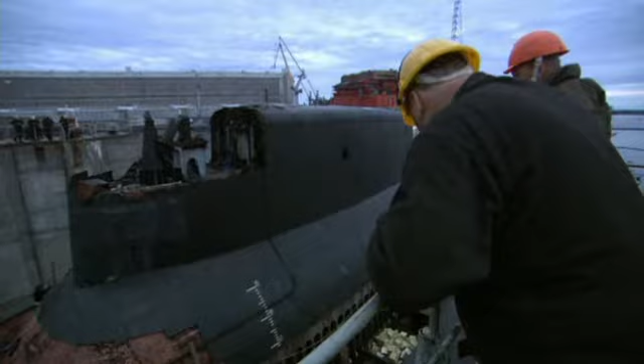It's a risky mission. They must dismantle, decontaminate, and dispose of 2 nuclear reactors filled with radioactive waste. A minor accident could be a radioactive disaster. It's the ultimate challenge, breaking down the Typhoon.

Severodvinsk, Russia, a small industrial city on the shores of the White Sea. The winter temperatures are brutal and the daylight hours are short. In this frozen no man's land sits one of the largest Cold War relics in the world, a Typhoon-class Soviet nuclear submarine. The Soviets called it Akula, the shark, and like its namesake, it's a deadly predator.

The massive sub stretches 170 meters long, stands over 4 stories tall, and weighs over 23,500 tons. It's almost as large as a cruise liner. In its prime, this first strike war machine carried 20 nuclear missiles and housed 150 elite Soviet submariners.

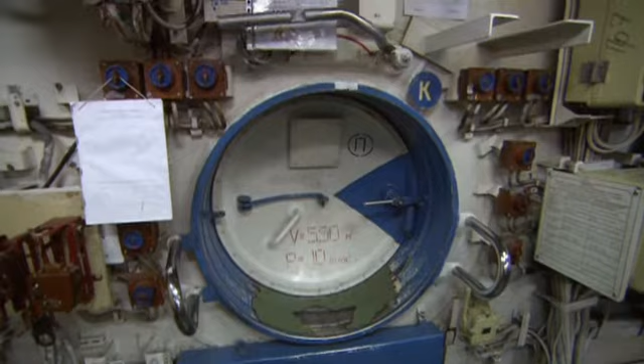The Typhoon was constructed to withstand a nuclear strike. Deliberately deconstructing it was never considered by its Soviet designers. It will be an epic challenge for Captain Piroshkov and his crew, most of them also retired Navy officers.

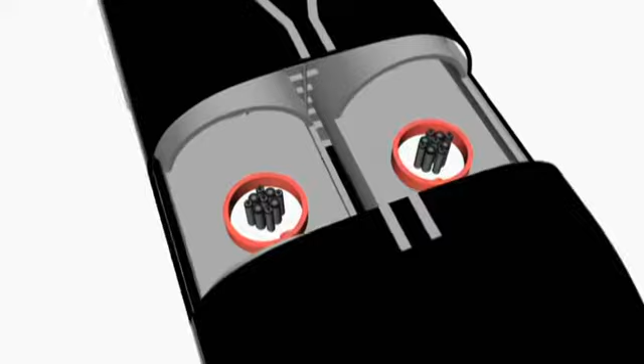They've already stripped the Typhoon of its top-secret technology and its 20 nuclear missiles. But Captain Piroshkov knows how dangerous this sub still is. It's powered by not 1, but 2 nuclear reactors. Inside those reactors sit radioactive fuel rods and liquid nuclear waste.

If that radiation escapes, this Typhoon could be a mini Chernobyl, potentially killing shipyard workers and poisoning the local residents. The entire town of Severodvinsk could be contaminated for years.

Captain Piroshkov's team of specially trained salvage experts will take the Typhoon apart in 4 carefully controlled stages. Stage 1: remove the highly radioactive uranium rods from the submarine's reactors. Stage 2: remove the reactor's liquid coolant, also dangerously radioactive. Stage 3: bring the sub into dry dock and cut its hull away, leaving only its radioactive reactor compartments. And finally, Stage 4: float the radioactive compartments to a nuclear waste dump on a remote island 800 kilometers away.

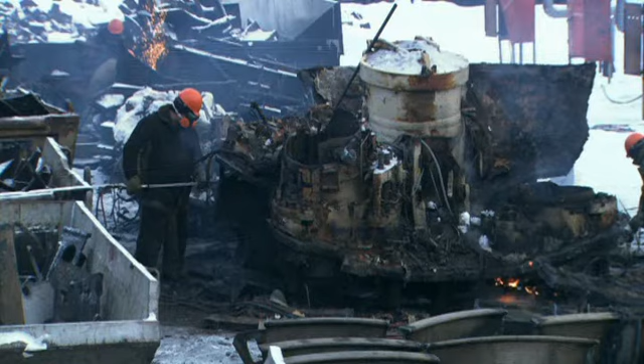The breakdown will take place in the once super-secret Zvyozdochka shipyard. This is where the Soviet Union maintained the ships and subs of its Cold War fleet. It looks like an oversized junkyard, but it's one of only 3 facilities in Russia that can safely break down a nuclear submarine.

Captain Piroshkov's mission begins on a bitter cold February morning, 24 hours before stage 1 of the breakdown begins. The temperature outside is minus 15 degrees Celsius. The Typhoon is icebound. But soon it will begin its final journey.

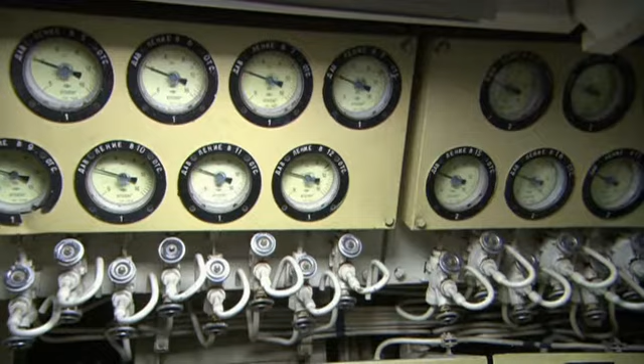Captain Piroshkov has kept the Typhoon powered down for the last several months, enough time for its nuclear fuel to cool down to a safer radiation level. Deep in the reactor core, the fuel rods are still radioactive, but not hot enough to risk a nuclear chain reaction when they are removed. Powered down, most of the sub is dark, like a ghost ship haunted by the loss of a bygone era.

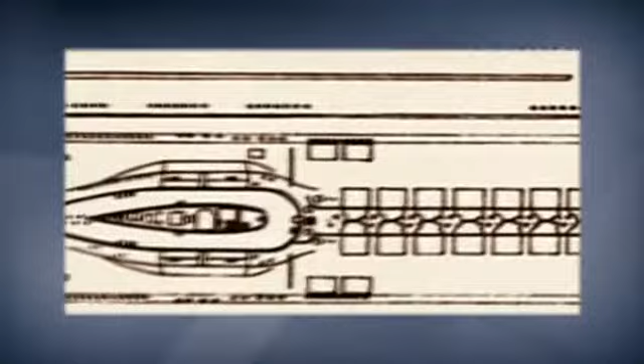The Soviet Navy first deployed the Typhoon-class submarine during the Cold War in the 1980s. It was the largest submarine ever built. Only 6 of its kind were ever constructed. It was designed with World War III in mind, a mobile attack weapon armed with 20 intercontinental ballistic missiles, each carrying multiple nuclear warheads. From deep beneath the sea, the Typhoon could hit targets over 10,000 kilometers away. A single one of these 83-ton nuclear missiles could destroy a city the size of New York.

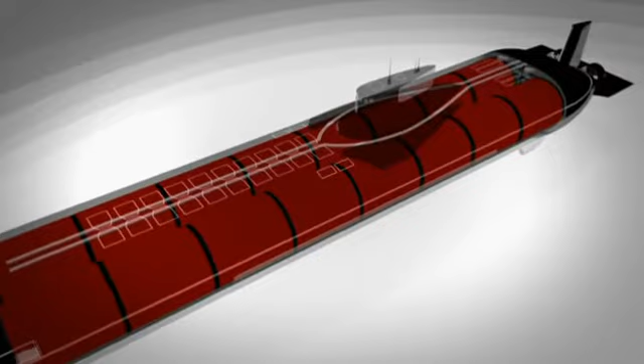Creating a submarine to accommodate these missiles and a crew of 150 meant designing a revolutionary hull structure. The Typhoon is the only submarine ever built with not one, but 2 inner hulls. They run side by side within the 170-meter external hull, improving the Typhoon's survivability. Even if one hull is breached, the crew could evacuate to the other hull for safety.

The Typhoon is essentially a floating nuclear power station, generating enough energy to power a small city. Its giant propellers are driven by some of the biggest nuclear reactors ever put on a submarine.

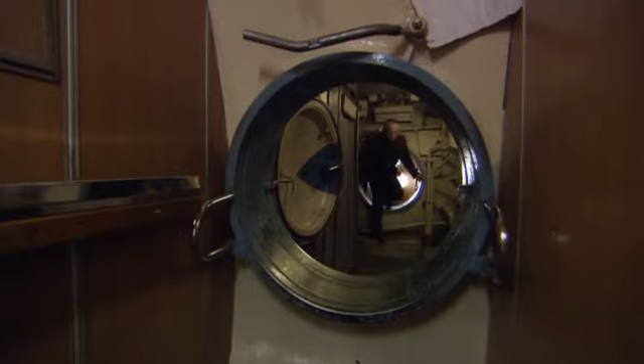Captain Piroshkov's heading for those reactor chambers. He must inspect them one last time before dismantling begins. His path takes him by the sub's various amenities, including the gym. A sailor on a submarine doesn't have very many opportunities to move around, so on a Typhoon, they had a gym.

Here, there's a punching bag. If you want to work on your cardio, here you have a basic treadmill.

Sub-commanders and their crews lived underwater for up to 4 months. It was a town beneath the sea. And the Typhoon had one luxury not found on any other sub. Because of its unique size, this particular submarine allowed for a swimming pool where the sailors could go for a swim.

Captain Piroshkov's destination is Compartment 19, the site of Typhoon's nuclear reactors. To most of the Typhoon's crew, Compartment 19 was and is off limits.

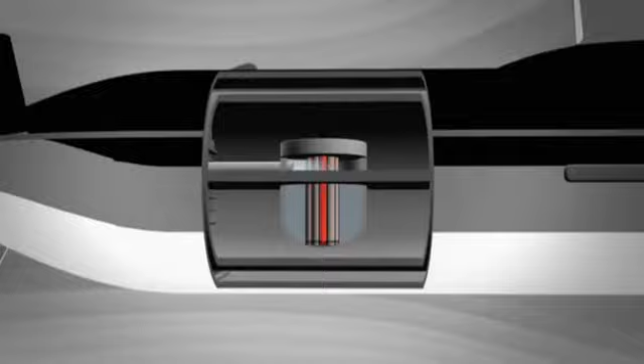Most nuclear-powered subs have 1 reactor. The Typhoon has 2. A submarine's reactor is essentially a highly radioactive tea kettle. Metal tubes filled with uranium fuel tablets serve as heating elements. Water circulates around these radioactive fuel rods, cooling them and producing steam. The steam then powers the submarine's propulsion systems. The reactor is sealed to prevent any radiation from leaking out.

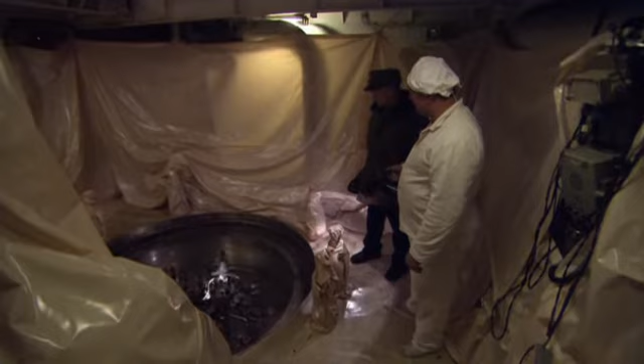At dawn, Captain Piroshkov's team of engineers will begin the dangerous task of removing the nuclear material from the twin reactors. They have wrapped the entire area in plastic. It looks flimsy, but in the worst-case scenario of a radiation leak, it will contain the radioactive particles and protect the crew. This area will be totally off-limits once they breach the reactor's lid and expose the fuel rods.

With just hours to go, everyone is on high alert. Captain Poroshkov gives the order to breach the Typhoon's reactors. The sub's nuclear fuel rods must be removed from its reactor cores. They'll be encased in radiation-proof containers and lifted out by this giant 72-ton crane.

But the weather may be the wild card in Captain Poroshkov's plans. The shipyard sits 2,800 kilometers from the North Pole. Fierce winter storms with strong winds can strike without warning. A rogue gust of wind hitting the crane while it's unloading could cause a deadly radiation leak. So the crane has an automatic shutoff sensor. If the wind is too strong, the 72-ton machine will instantly shut down.

A heavy winter storm threatens the city. But Captain Poroshkov decides to go ahead despite the weather. He gives the order to begin the destruction of the largest submarine ever built.

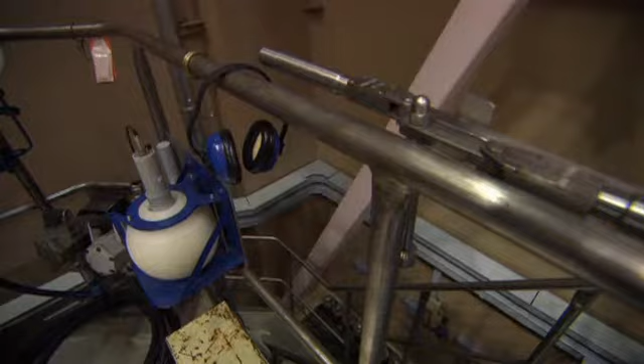Stage 1 of the Typhoon submarine dismantling. The team begins the removal of fuel from the sub's 2 reactors. Now, Viktor Yarmoshenko takes over. He's the engineer in charge of the reactor defueling operation.

We do this to protect the environment. We wouldn't want radioactive waste collecting on the sea bottom. Also, we're aware that spent nuclear fuel can be used in nuclear terrorism to make a dirty bomb, so we have to carefully remove it.

Viktor's challenge is something the Typhoon's designers never envisioned. He must break into its reactors and remove the radioactive uranium fuel rods without exposing his team or the environment to the deadly radiation.

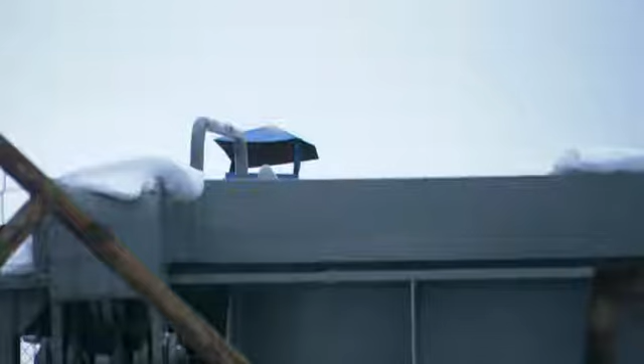The defueling process is potentially very dangerous, so we have to maintain very strict rules of radiation safety here and constantly monitor the reactor. He clears the submarine of all personnel. No one is allowed inside the reactor compartment once the defueling begins. It is simply too dangerous.

They load the first uranium rod into a special transport container made of radiation-proof lead. A crane then lifts this lead bottle off the sub and swings each rod into the storage hangar. Everyone is on edge.

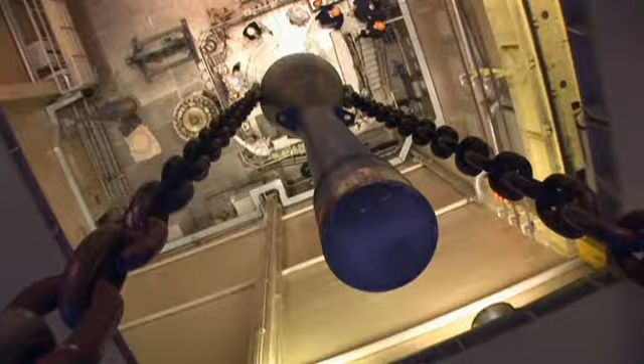There's enough uranium in this bottle to kill everyone in the room and contaminate the entire city.

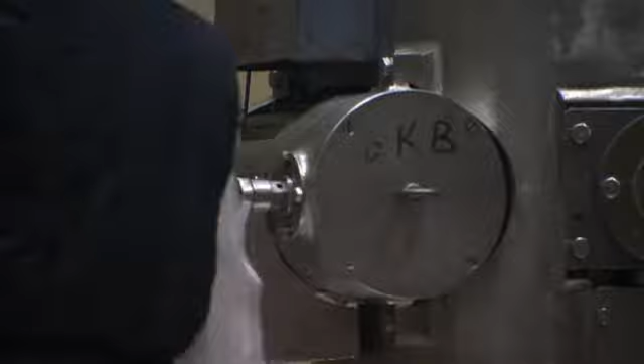The workers guide the fuel rod with extreme care into another radiation-proof drum. Once the rod is safely in, it's sealed. The crane performs this delicate and dangerous operation multiple times in the next several days. There can't be a moment's lapse in attention, no matter the freezing cold or fraying nerves. The smallest mistake could cause a fatal accident.

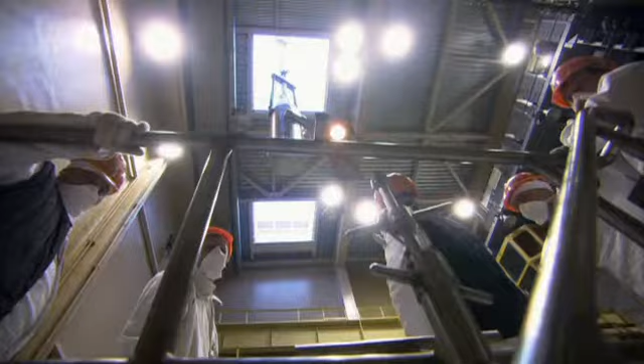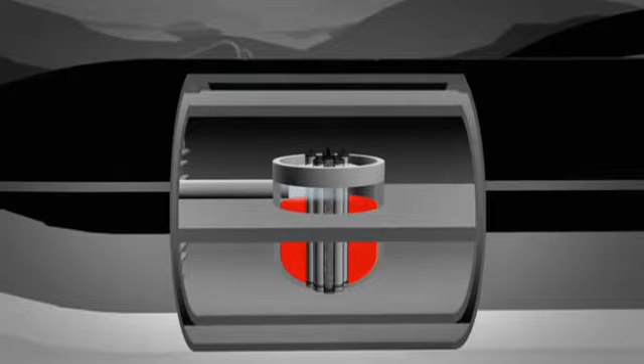When the last uranium rod lands in the storage container, Stage 2 begins, removing the radioactive liquid coolant from the dead reactors. When the sub was on active duty, the coolant flowed around the hot nuclear fuel rods inside the reactor to cool them and produce steam for the propellers. It's highly radioactive and deadly. The coolant is pumped from the Typhoon's reactor to this storage facility on the docks.

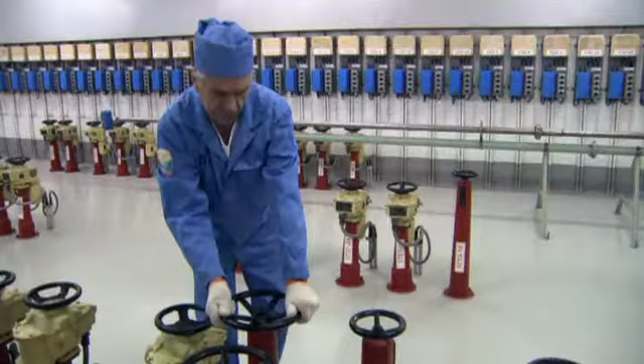Here, the irradiated nuclear coolant is stored in steel containers encased in thick layers of concrete. Workers constantly monitor the radiation levels. Any increase, and this entire facility will be evacuated and sealed. But this nuclear waste isn't just going to sit here. With a turn of a valve, it begins flowing through underground pipes to the processing lab where the radioactive solids are filtered out.

Engineer Anton Chinakhov is in charge. Anton and his entire team must wear protective clothing. The uniform is necessary to protect our bodies from radioactive contamination and also to prevent the radioactive particles from being carried outside the worksite. So that's why we put on the robe, the hat, and the booties.

This is the heart of Stage 2 of the Typhoon's dismantling and Anton's mission control. These pipes are pumping nuclear coolant. None of Anton's team will ever see this highly radioactive liquid. If they do see it, it'll mean something's gone very wrong.

Liquid nuclear waste contains radioactive isotopes. They emit radioactive rays dangerous for the human body. Besides that, this waste contains a variety of toxic additives. So to protect the people who live around here and to protect the environment, there's a certain special way of handling this type of waste.

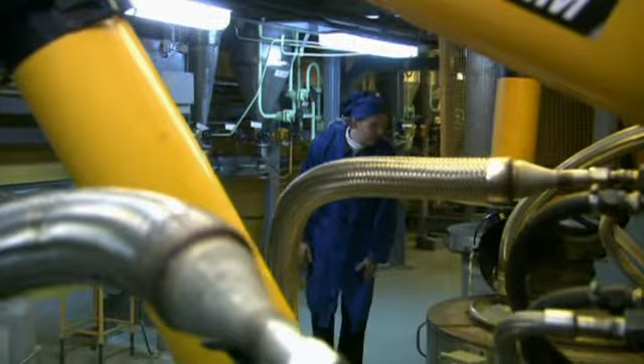The radioactive waste passes through a special chamber to trap its deadliest isotope, cesium. A speck of cesium the size of a pinhead can kill a human within minutes. So they'll dispose of it separately.

The way this works is, the liquid nuclear waste goes through a layer of a special absorbent, which isolates the cesium isotope. The absorbent is held in a special filter, which is here inside a protective container made of thick steel.

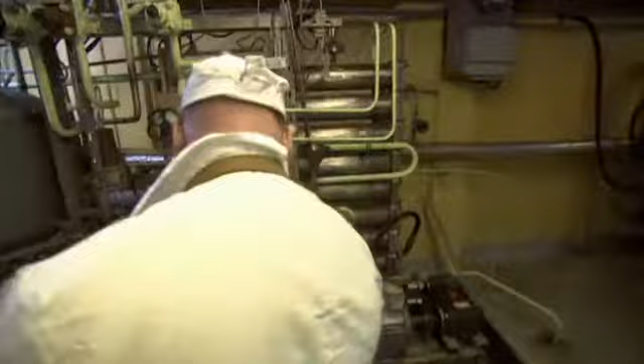The cesium's caught, but the liquid coolant is still far from clean. A second set of filters catch the remaining heavy radioactive particles. It all happens inside these thick steel containers to protect Anton's team.

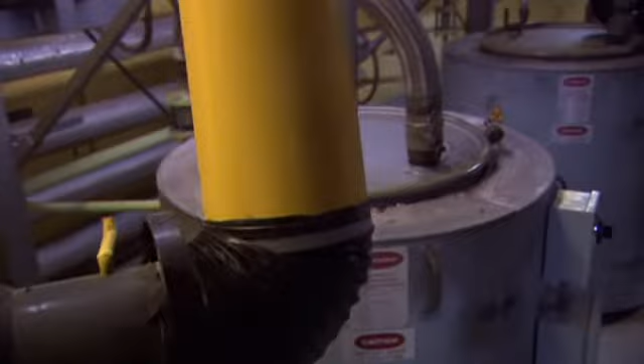A powerful dryer then turns the solids separated from the liquid coolant into a highly radioactive concentrate, the consistency of salt. So it means as a result of the processing, the volume of nuclear waste is reduced by 100 to 1,000 times.

Anton takes samples of the water separated from the radioactive concentrate and sends them to an off-site lab for purity testing. When he receives final confirmation the water is completely free of radiation and toxins, Anton will order it flushed into the sea.

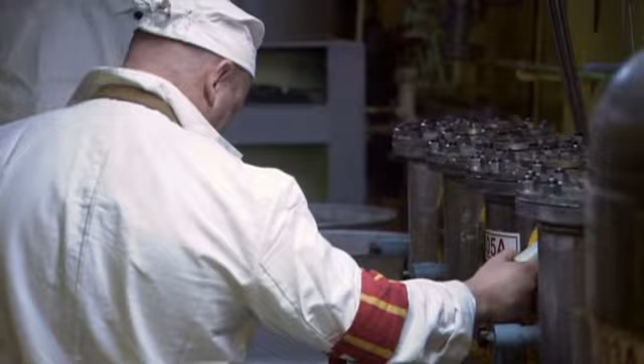Stage 1 of the Typhoon's dismantling took days. Stage 2, processing liters of nuclear coolant, takes several months. And just like the earlier removal of the fuel rods, constant attention can be the difference between life and death for Anton's crew.

Workers constantly monitor radiation levels with Geiger counters. We have documents that set a norm for radiation levels for personnel which can't be exceeded. If the radiation levels go above the norm, it will trigger an alarm and we will take measures to lower the radiation levels.

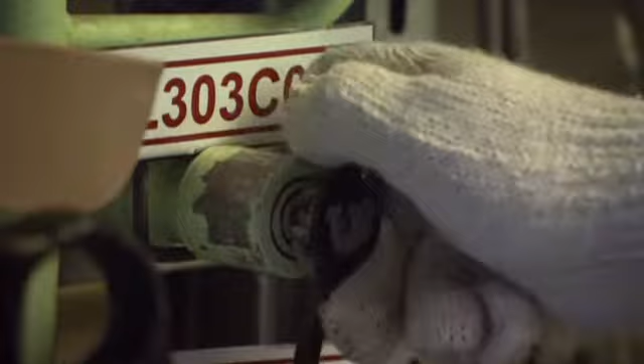A spill of the liquid nuclear waste would quickly spread radiation beyond this lab, potentially into the soil. It would be nearly impossible to clean up and could contaminate the local area for generations. In addition to the specially trained personnel, an automated system monitors the radiation levels.

Stage 2 proceeds. Anton's satisfied. The radiation levels are safe and steady, but that could change in seconds. If the radiation levels are elevated, the sensors go off and the alarms are triggered, and all personnel are notified.

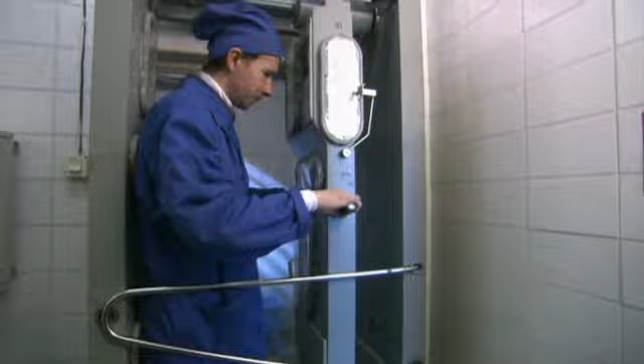At the end of every day, each member of Anton's team undergoes a full body scan for radioactive particles. Anton gets the white light. He's in the clear.

Several months later, winter turns to spring. The crew has safely removed all the radioactive coolant from the sub's reactors and stored its uranium fuel rods. Now, stage 3 can begin.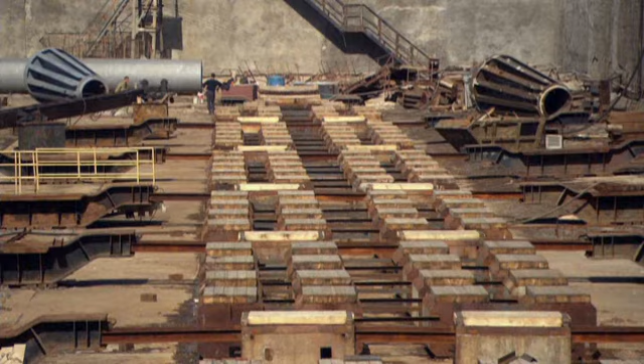It may be the toughest challenge of them all. They must maneuver the immense sub into a dry dock barely big enough to hold it, cut it apart, and recycle it.

And the man in charge of this entire dismantling operation, Captain Vladimir Poroshkov, isn't even sure if this Typhoon will float. The sub's position in the water has changed. We must make sure it doesn't tip forward or sideways.

The May sun has melted the ice around the Russian nuclear submarine. The crew readies the sub for the last journey it will ever make. It's heading 8 kilometers across the channel to the shipyard's massive dry dock,

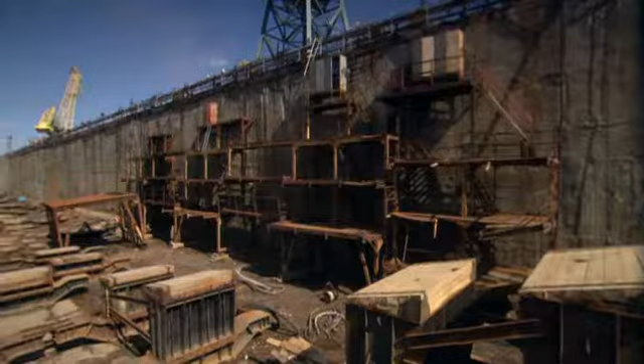where it'll be cut into scrap metal and recycled. But it's a difficult task to move a 23,500-ton ship that no longer has an engine. Akula, the Russian shark, is now a beached whale.

But first, the crew must lighten the huge sub, or the tugboats won't be able to maneuver it into the dry dock. And even if the tugs could maneuver it, right now the immense sub is too heavy for the dry dock floor.

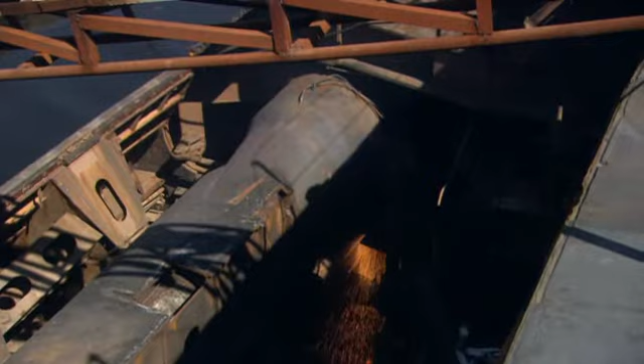Captain Poroshkov tours the ship constantly as his crew cut away its missile silos and stabilizing ballast. This ship is really big and heavy, so we're doing this to lighten the amount of pressure on a dockside platform.

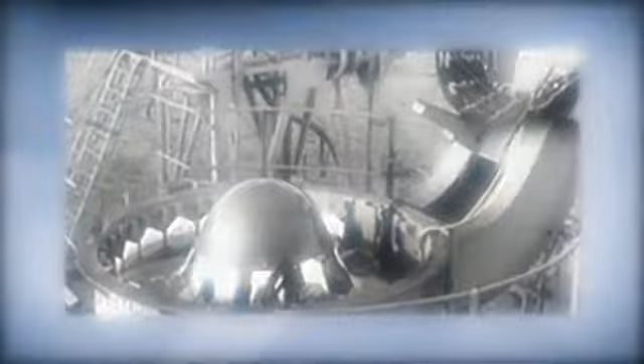Piece by massive piece, a giant crane drags off what were once integral parts of a deadly war machine, including these missile tubes, the launch site for a nuclear weapon that could destroy a distant city.

Now it's just scrap metal, destined for recycling. It takes the crew 3 weeks to strip away the heaviest sections of the Typhoon.

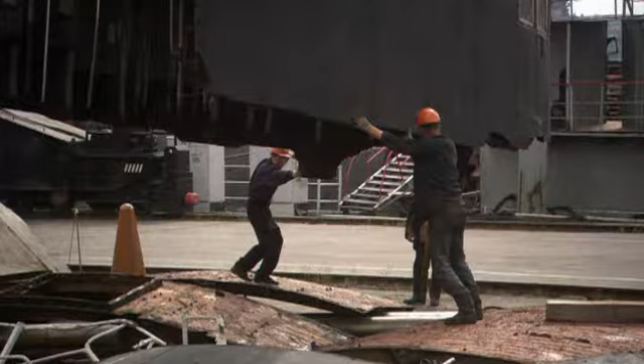The captain's bridge, huge chunks of the outer hull, and parts of the sub's steering and stabilization systems. The vertical steering fin has been removed. It is really not necessary for maneuvering the sub into the dock, so we cut it off.

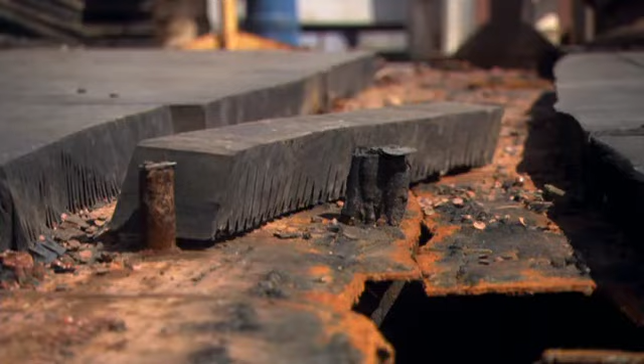They must also remove the sub's unique protective layer. This is hydroacoustic coating. It covers the submarine hull in its entirety. The rubber absorbed acoustic signals from the inside of the sub, making it virtually undetectable to the enemy. Silence was the Typhoon's primary defense against surveillance and attack subs.

In order to dismantle the outer hull, we need to take all this rubber coating off, and the metal is then recycled. The rubber is also recycled. It can be melted down and used to add in asphalt or car tires.

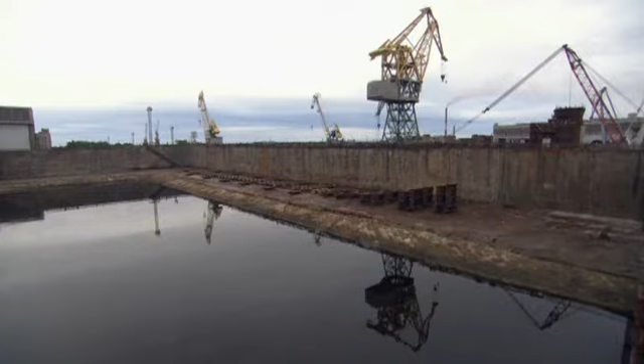The captain must make sure the Typhoon is ready to be brought into the dry dock. Inside, they will beach her on a flat platform. Anything on the outside of the hull that might cause it to topple over must be cut away while the sub is still afloat.

Captain Poroshkov sends a team of divers to examine the submarine's bottom. The diver disappears into the murky water and reports in as he moves along the giant hull.

How much distance between the body and the seabed? Good. Keep moving, keep moving. Do you see anything?

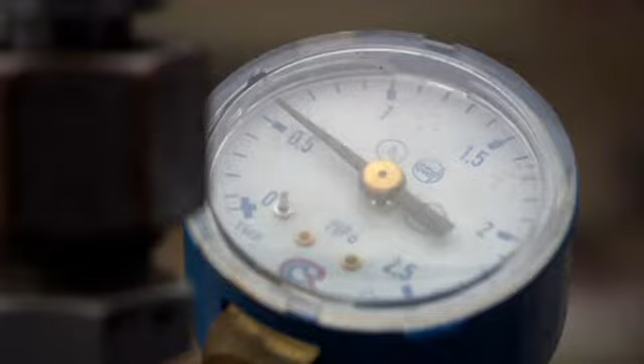The diver stays under for almost an hour. I want to make sure nothing is sticking out over there. Finally, he emerges. It's all clear. All I saw was fish, clams, and seals.

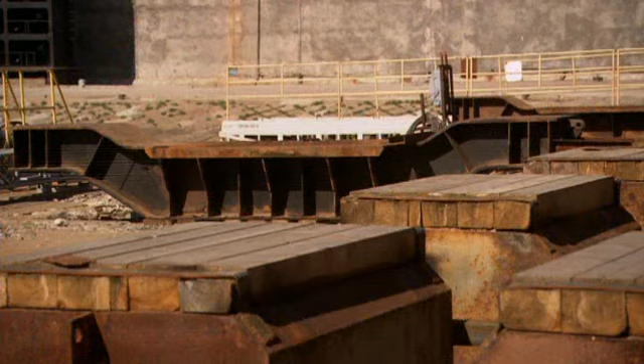The Typhoon is ready to move. Meanwhile, on the other side of the harbor, the dry dock is ready for the sub's arrival. Engineers and construction workers have built a giant framework of steel and concrete to hold and support the Typhoon. These supports will take the entire weight of the massive submarine when the water's drained from the dry dock.

But the sub must be parked exactly above these supports. If she's not, she could topple over when the water drains and crash to the bottom of the concrete pool. Dockmaster Yuri Kavardin must line up the 170-meter vessel with incredible accuracy.

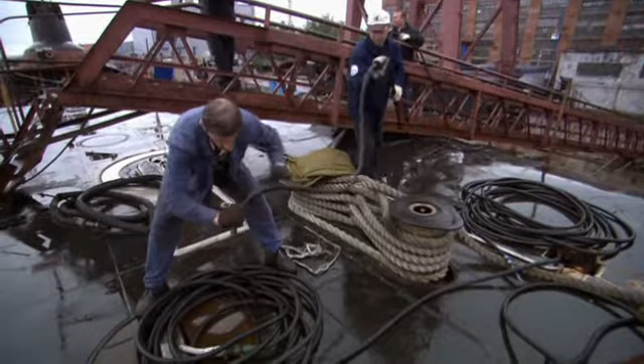Captain Parashkov's crew aboard the Typhoon reel in its anchoring cables. It's about to begin its final journey. It's a task of remarkable precision.

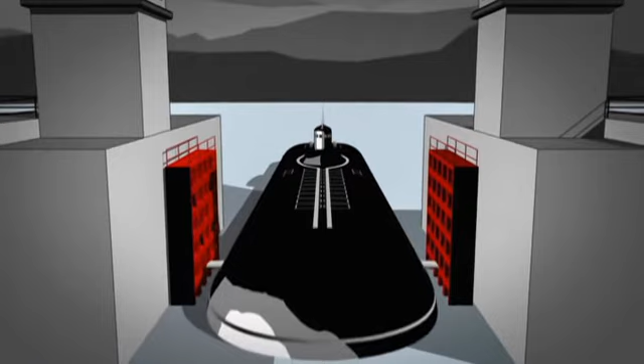The dry dock was never designed with a Typhoon-class submarine in mind. Its gate is 25 meters wide. The sub's hull measures over 24 meters across, affording it less than 1.5 meters clearance on either side. That's a tight fit. And although the Typhoon's nuclear fuel and coolant have been removed, its reactor chambers are still highly radioactive. Worst case scenario, a collision with the dry dock gate could cause a radioactive leak.

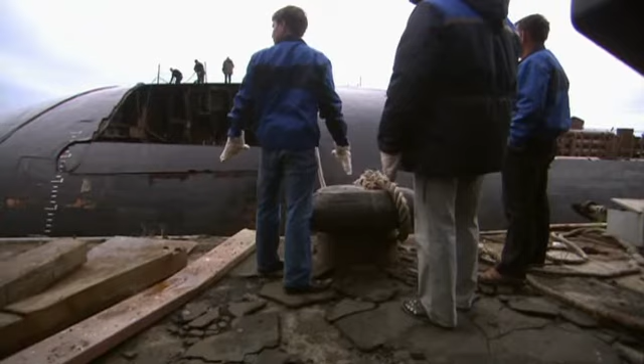That's if it gets to the dry dock gate at all. The team has lightened the sub so that tugboats can tow it. But stripping it down has made it unseaworthy. There is no manual for dismantling a Typhoon.

As the sub is lightened, it raises in the water. The sub's position in the water has changed. Our goal now, to keep it afloat without any leaning forward or sideways. If the hull leans to one side, it will make the sub impossible to maneuver.

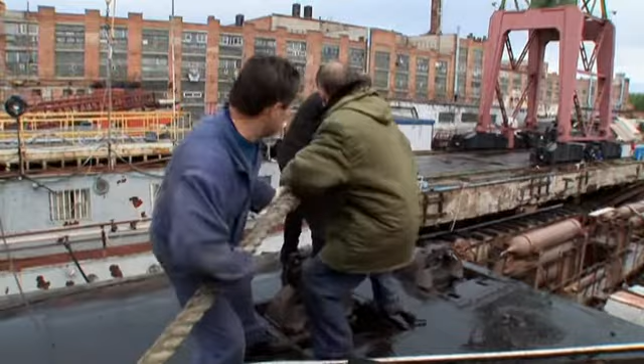The tugboats move into position and attach their massive ropes. Captain Parashkov gives the order to launch. He'll direct the sub as far as the dry dock gate. The tugboats control the Typhoon's every move.

This giant is now completely helpless. It's an emotional time for the crew and shipyard workers. Many of them maintained this sub during its years on active duty. Some were submariners themselves during the Cold War, while others actually helped build this Typhoon.

I feel like I am at a funeral. It's really a shame. And the saddest part is, we are destroying it with our own hands. But these are the times we live in. What can you do?

Now they must say goodbye to the incredible underwater war machine that made so many so proud. The Typhoon moves at a snail's pace, a far cry from its top underwater speed of 50 kilometers per hour, centimeter by centimeter, meter by meter. Tugboats and sub approach the dry dock gate.

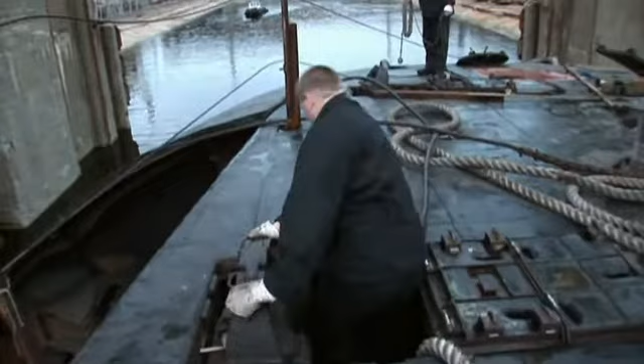The tugs continue nudging the Typhoon to the dry dock's entrance. From this point on, Dockmaster Yuri Kavardin is in charge.

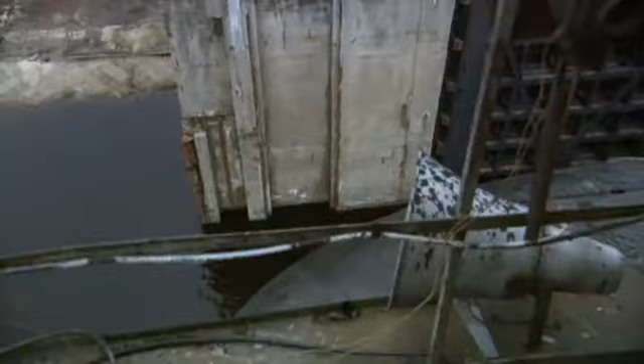The sub is almost as wide as the gates themselves. It's already had one collision. Another could breach the hull and cause a leak in the still radioactive reactor compartments. Everything's down to Kavardin's directing skills. It's like parking a tank in a garage built for a car. Kavardin's skill is holding, so far. There are just centimeters between an immovable wall of solid concrete and the monster submarine.

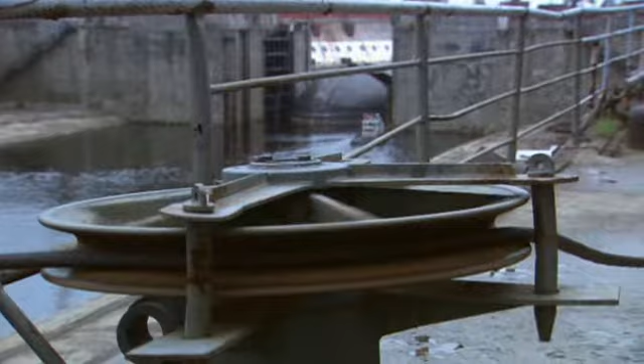Now it's down to human power. On Yuri's orders, the crew man ropes and pulleys to pull the immense submarine through the gates. And they're racing the low tide. If the tide turns before they get the Typhoon inside, the current will drag it back out into the main channel. The entire day's operation will have been worthless.

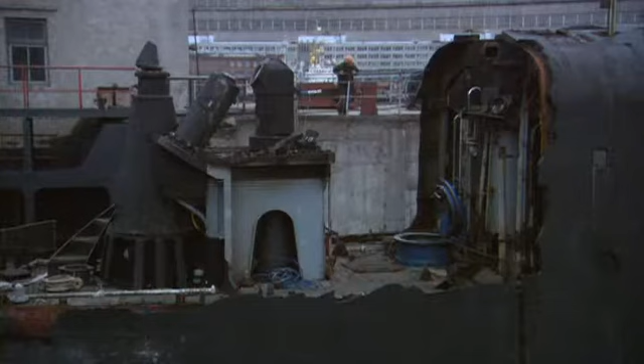Against the clock, muscle power moves the mammoth sub its final meters. Just as the tide begins to turn, the gates swing shut. But Yuri's most difficult maneuver is yet to come.

He must position the Typhoon in place by hand, precisely above the adjacent supports. Right now, the supports are out of the water. The sub must be floated above them. To do that, Yuri needs more water to maneuver in.

Huge pumps turn on. Water surges into the massive pool. Over the next 4 hours, the water slowly rises. Finally, it's high enough to begin moving the sub.

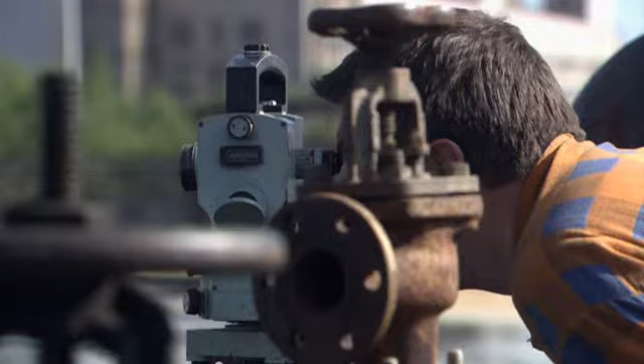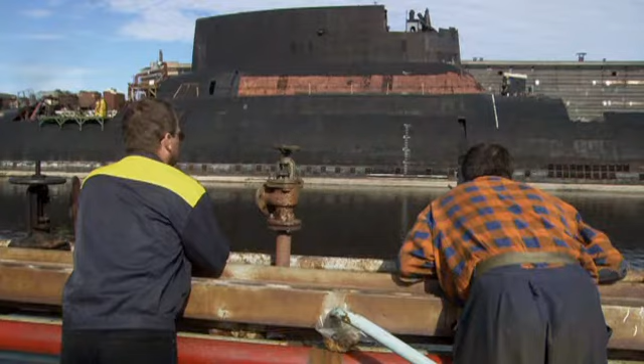Ropes fan out. The crew is ready. Yuri takes precise measurements of the sub's position. He must line up a ship the length of nearly 2 football fields over the supports with the tiniest margin of error. Just 50 millimeters, about the length of 2 hairpins.

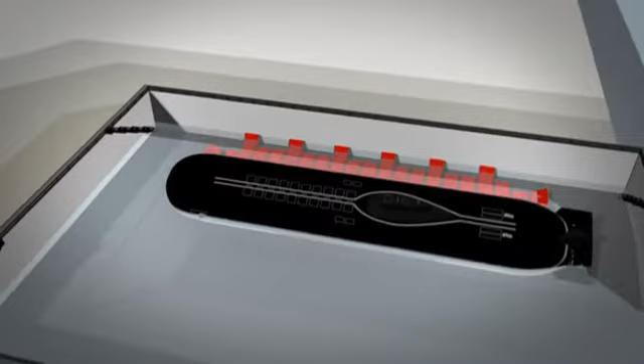If it's not aligned exactly, when the water drains, the Typhoon could overbalance and crash to the dry dock's concrete floor, with its 2 empty but still radioactive reactor chambers. Yuri checks and rechecks the measurements. They're not adding up.

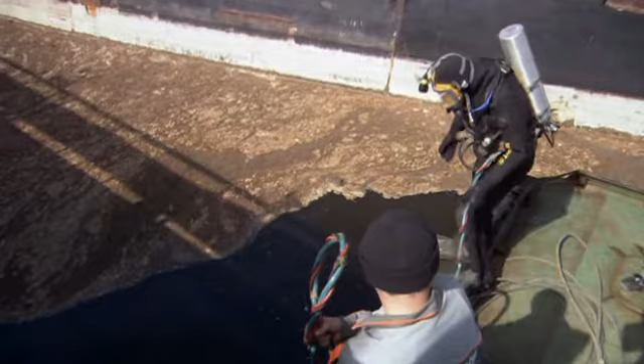He sends a diver down for a visual check. The diver moves along the hull, reporting back. Tell me the distance between the stocks and the sub. Good. Good.

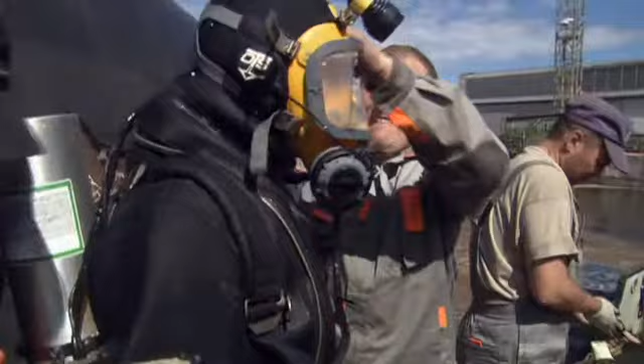After 20 minutes, he surfaces. As far as he can see, the sub is in position. But no one will know for certain until it comes down.

This is it. The tugboats leave the dock. Massive pumps turn on, slowly sucking the water from the dry dock. The Typhoon, the biggest submarine ever built, is revealed in its entirety. Not since it was created as one of the Soviet Union's most devastating weapons of war almost 30 years ago has the Typhoon been seen like this.

Longer than a city block, 4 stories tall, as heavy as 75 jumbo jets. The last moments of the world's largest nuclear submarine. And Yuri Kovartin has brought it in.

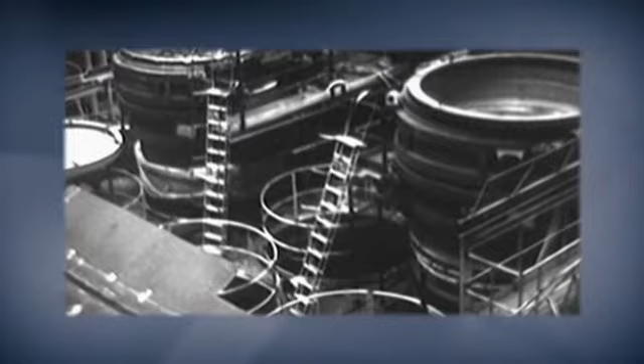His job is done. Now it's time to turn this once mighty war machine into scrap metal. The Typhoon began as a triumph of Soviet nuclear engineering and shipbuilding. Now it's simply an immense lump of steel. But not just any steel. The Typhoon was made from only the best and the strongest steel in the Soviet Union. Russia needs this super steel for future projects, and the Typhoon can provide thousands of tons.

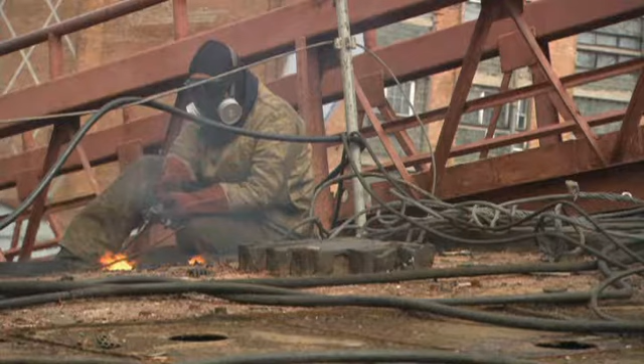There's only one way to cut a monster like this into pieces small enough to melt down: by hand. Every day, workers armed with blowtorches cut away another section of the sub and winch them away to giant metal cutting machines. Day after day, chunk after chunk, month after month. In a few months, the Typhoon goes from submarine to a giant metal wreck.

Now, all that steel must be recycled. They haul it to another part of the shipyard, run by engineer Andrei Meshkov. He's in charge of the special machines that will process the thousands of tons of Cold War steel. You can make whatever you want with it. It's used to make pipes, support beams, sheet metal.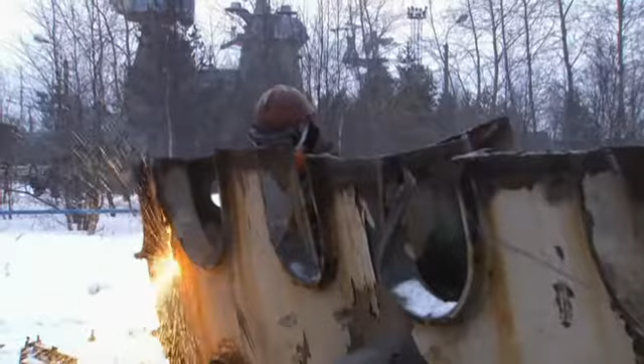Stage 1 of the recycling process: slicing up the giant sub by hand. Andrei's team sets to work with blowtorches. It's all about cutting the steel into smaller and smaller pieces. But nearly a year has passed since the entire operation first began.

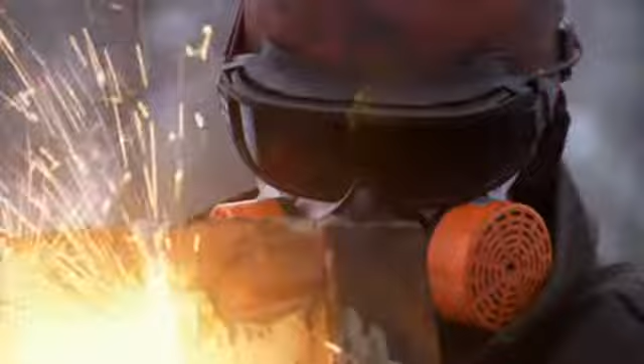It's midwinter again, making work tough for Andrei's crew. When a man is standing there with a blowtorch, it's hard labor. They hold the blowtorch in their hand all day long, outdoors. Sometimes it's windy, freezing, snowing. These people work really, really hard.

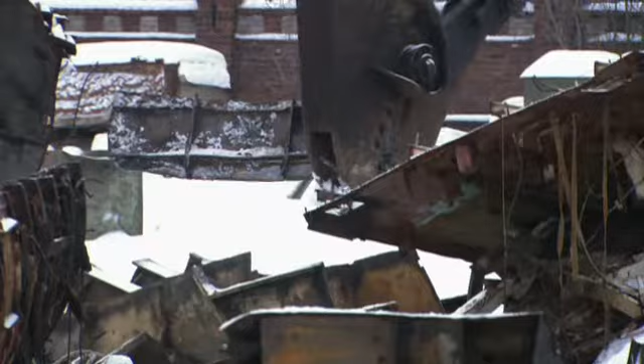The cut steel chunks go into a giant guillotine, which chops them even smaller. Once, the Typhoon's protective outer hull withstood incredible pressure as it cruised the ocean's depths. But now, the guillotine crushes that same hull like a piece of cardboard.

Not much goes to waste when a submarine gets recycled. One of the sub's most valuable components is its hundreds of tons of copper wire. But the copper must be separated from its rubber insulation, or it's worthless.

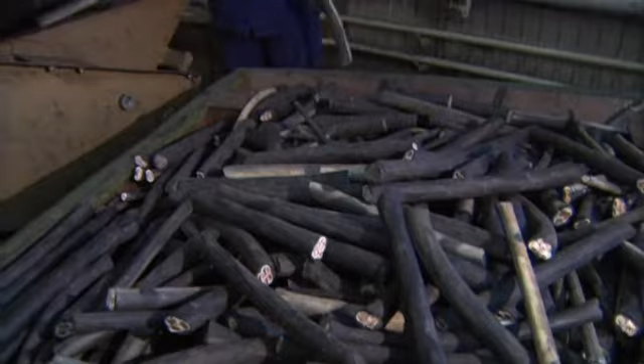Of course, it's easier to just trash the cable, but we want to recycle them and get the valuable metal that we can reuse. So we built this machinery so we don't have this mixed waste of metal and rubber together. We're decreasing the amount of waste produced in the process of decommissioning. Specially designed machinery separates the copper from its insulation and churns out fine chips of pure copper, ready to be resmelted.

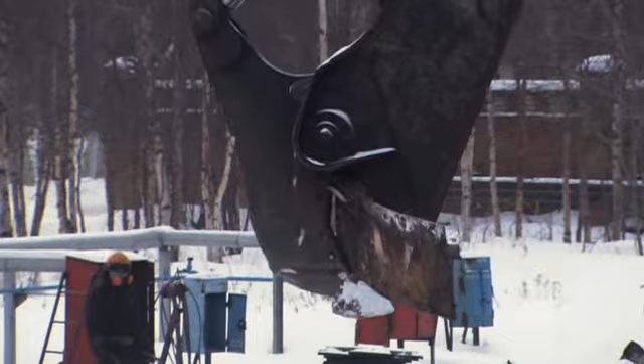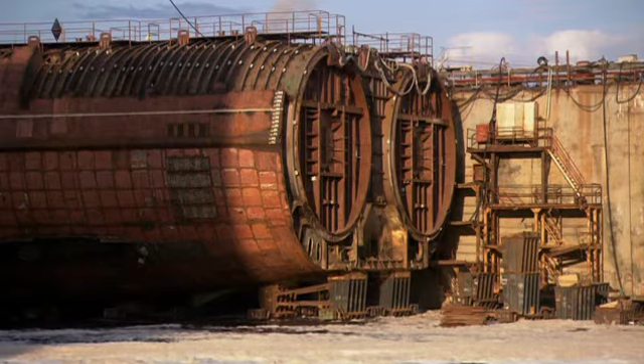The Typhoon is almost completely dismantled. There's virtually nothing left of the gigantic sub that once weighed over 23,500 tons. What remains is too dangerous to recycle: the small core that once housed the sub's nuclear heart, its twin nuclear reactors. Its uranium fuel rods and coolant have been removed, but its 2 reactor compartments are still radioactive.

They remain attached to 4 empty compartments to shield the radiation and keep the sub afloat. This metal can't be used again. The whole block must be towed to a Russian nuclear waste site on a remote island off the Kola Peninsula. Dockmaster Yuri Kuvardin is in charge again.

He'll direct the reactor chamber off its supports and into a deep section of the dry dock, where it can be towed out to the open harbor. But first, they must flood the dry dock.

Yuri's lieutenant in this operation is Alexander Nikolaevich, foreman of the dock's immense pumping system. We have 4 pumps here, but right now we're only using 3.

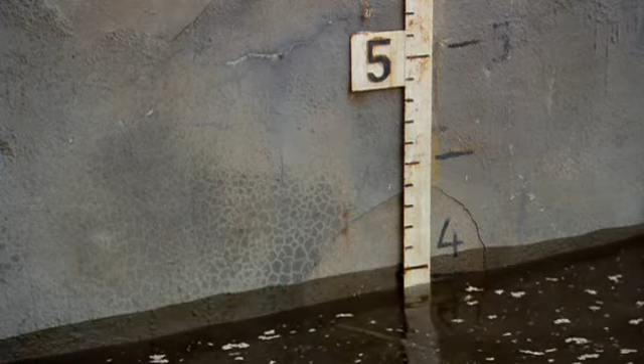3 huge pumps force in millions of liters of water. The operation lasts 3 hours. 3 million liters. 7 million. 11 million. The dry dock slowly fills. Finally, at around 15 million liters of water, they stop the pumps.

The reactor compartment is afloat. Now Yuri must maneuver it into the deeper part of the pool and outside of the dry dock's gates. The team's last risky mission is getting rid of the sub's deadliest component.

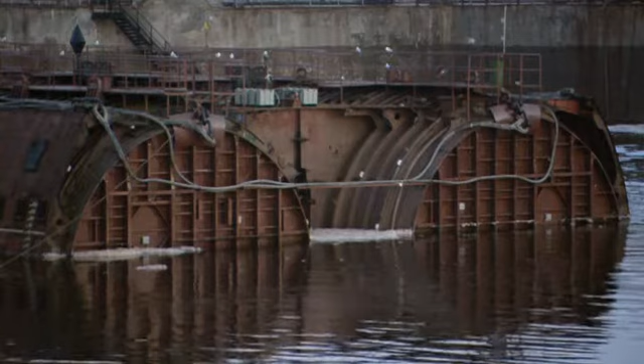Dockmaster Yuri Kuvardin must position the Typhoon's reactor block in perfect alignment with the dry dock's gates. Every operation at the dock is an exciting event. It's always unique, especially when you realize this is the finale for the work of hundreds of people. Right now, the work you see here at the dock is a little bit sad. It's sad because when we received this ship here, it was a Navy ship in all its glory. But it's leaving us like this, in this sorry state.

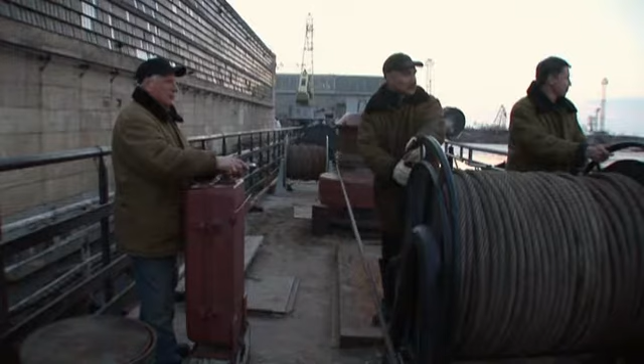Little by little, Yuri guides the reactor block into the deep water. Right now, the water level inside the dock is higher than the level outside the gates. Once the reactor block is in position, they will drain the dock until it's level with the sea outside.

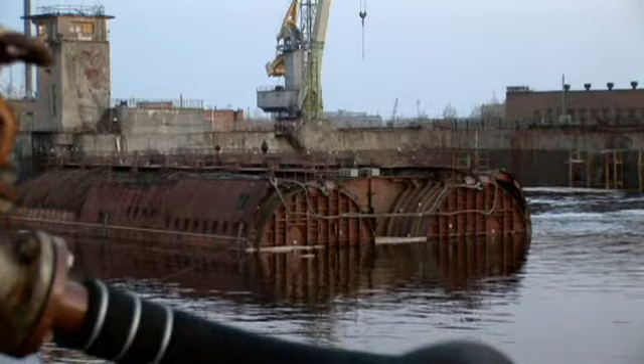But if the reactor block is out of alignment by as little as 1 meter, it could hit the shallow concrete floor, crack, and spring a radioactive leak. Yuri checks the measurements again and again. Right now the water is going down, and I'm checking its position from 3 viewpoints. Finally, he's satisfied and gives the go-ahead to lower the water levels.

The gates open one last time for the Typhoon. We are ready for anything. This is like a living being. We don't know how it's going to behave. We'll have to adapt and try to tame it like a caged tiger. This is something we've done before, but I can't say it's an ordinary operation.

The workers attach 7 pulleys with heavy-duty ropes. They will control the movement of the reactor block manually, tightening or loosening each rope as Yuri orders. The tugs are in position to push the block out of the dry dock.

On Yuri's commands, the workers slowly pull the floating lump of steel through the gates. There's only a meter on each side to maneuver. It can't be allowed to collide with the gates. A collision could breach the radioactive reactor chamber.

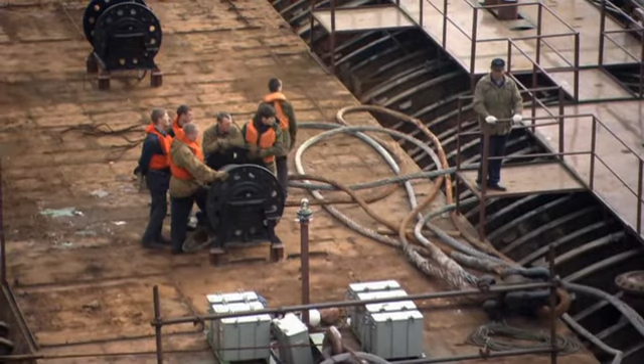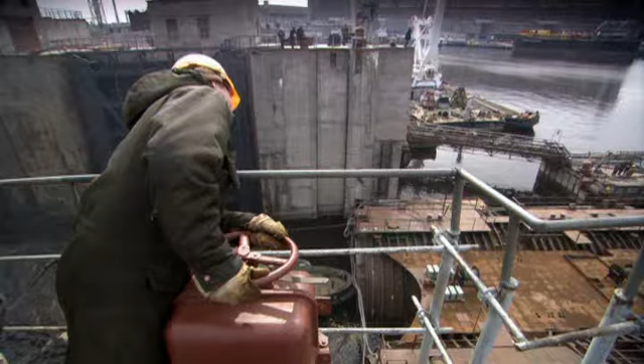All eyes are on Yuri. His orders are obeyed instantly. The reactor block squeezes through with only centimeters to spare.

The last nerve-wracking operation on the Typhoon's year-long dismantling is over. The reactor block, the final remains of the once massive submarine, sets off on a last journey to the nuclear waste site 800 kilometers away.

For 2 decades, the Typhoon prowled the oceans of the world, the Soviet Navy's supreme underwater trump card in the Cold War. Now, this submarine is no more. Its reactors emptied of nuclear fuel, its nuclear waste processed, its steel recycled for peaceful purposes.

Captain Poroshkov and his crew chiefs gather a final time to reminisce and remember. They pour the vodka and raise a toast. A farewell to glory, to the passing of the Typhoon, the greatest submarine ever built.